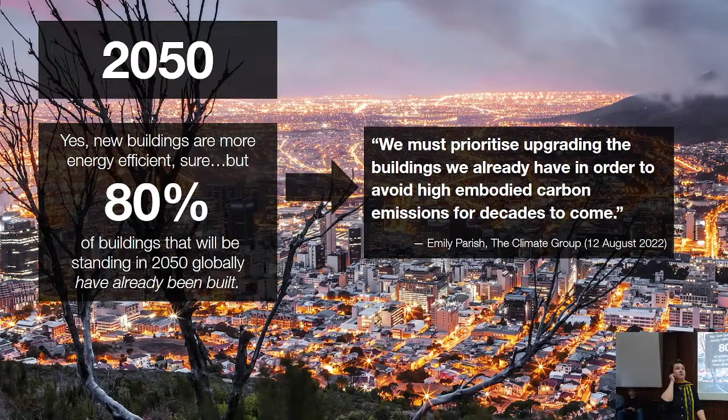In Africa it's a bit different. In Africa, 75% of the African stock will still need to be constructed. Africa is a little different - our context is different, but it's the same trajectory, right? And every 20 years, every city doubles in Africa, in size, scale, complexity, magnitude, everything. There's a lot of work to be done on this continent for the built environment.

But if all the buildings are already built, and they will be built very soon, in your own career, your 5-10 years that's coming, how long do we have to take care of these buildings after they are built? Right? It's not just build the building, we already have the building. What about the life of the building?

On average, a building, wherever you go, is 70 years old, including the one you're sitting in. It's a human lifetime - that's how old buildings are. They live longer than us, much longer than anything else we're busy with. We have buildings older than the industry of motor cars and vehicles. Buildings have lived beyond that. Buildings have lived through industrial revolutions. They're still here. So the average building is 70 years old.

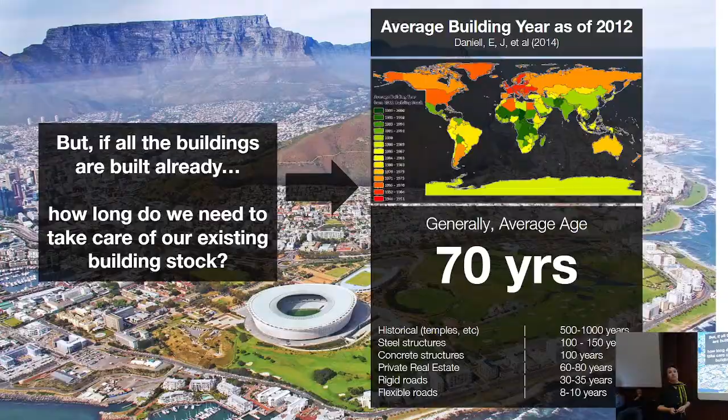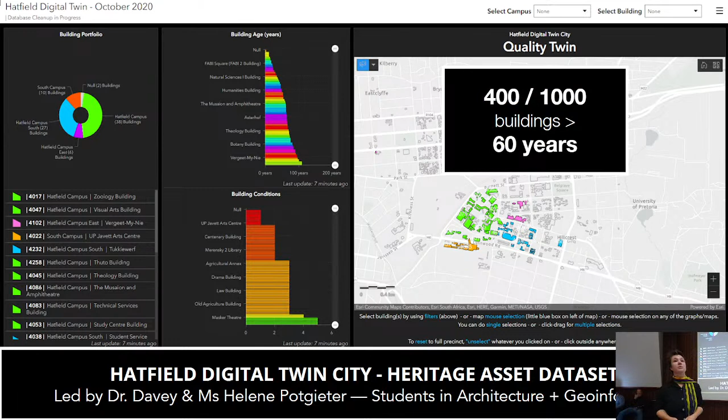You can see that in Tuks. The University of Pretoria is the second largest asset owner in the city, next to the city itself. We have 1,000 buildings, literally. Right now, 400 of them are already heritage buildings, and that number will go up.

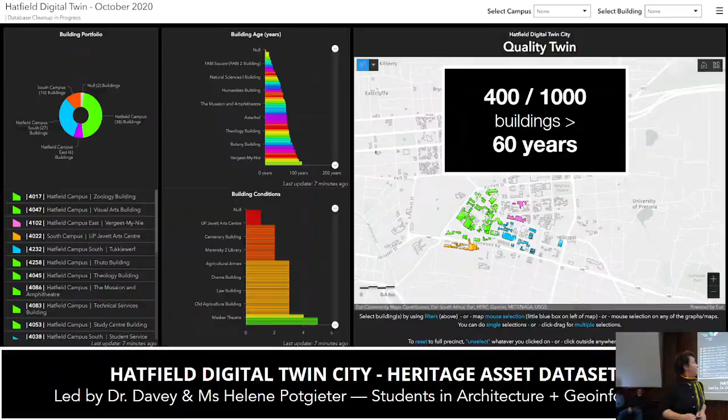So if we talk about the life of the built environment and your job in it, and the real big picture in your own lifetime, never mind beyond your lifetime, let's do some napkin math. I love napkin math. Let's pretend the average building design and development phase, average, maximum, is 3 years, right? Yes, there's exceptions now and then, and so it goes. But the average building takes 3 years to develop and design, right? And let's say it's 3 years to construct, okay?

And if you work in a high-performing environment like Europe, America, Ireland, whatever, those high-performing regions, that time frame is shorter - it's almost 9 to 24 months to build, construct, and be done with it. But that means 6% of our effort of a building's life is in design and construction, but 94% is in the life of the building. Operations, maintenance, use, energy, etc.

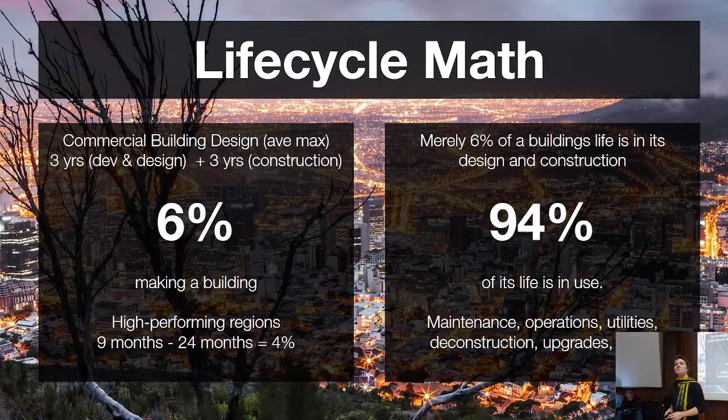If you go to the doctor with this problem, what would he tell you? We need to think differently about the built environment. We can't do it alone. How are we going to create a human habitat that thrives? How are we going to do it in Africa? How are you going to do it in your own lifetime? What is your legacy going to be when you leave this building?

This is why we Harambee. And Maloka reminded me why we use this word. What does Harambee mean? I heard it - someone had, yeah, what does it mean? To pull together, to swim together, to be together, to do work together. That's what Harambee means. It's Swahili, and it's Pedi for that word, right?

We can't build these cities of Africa if we don't do it together. It's impossible. So we are here as a community, and we're inviting you into this community to say, how are we going to build the digital world to help us service the physical world - building cities, communities, and environments? How are we going to do that?

But before we get together and do technical things, we need to change our culture. Our culture for building isn't working for us. It's not my job today to go into the details, you'll find it out very soon. If we don't change that culture, it will not change. So before we do tech, we must do culture.

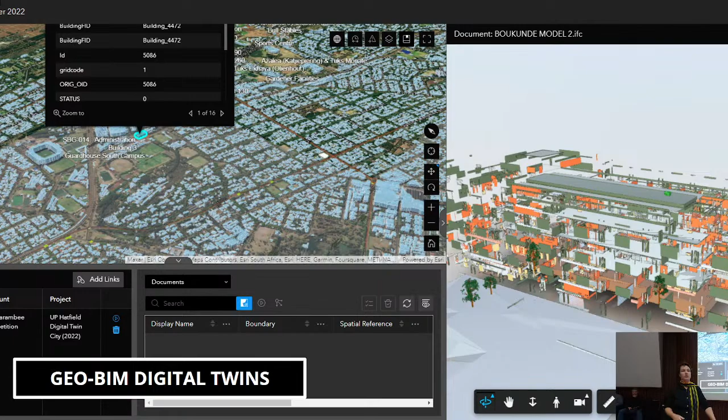And we're here at Harambee to talk and show that culture to you. If we can't build these future worlds, if we don't do it together, it starts with human behavior. We can do amazing things with technology. Go and have fun this afternoon, go play with the toys. We can all do these things, but if we don't do it together, it doesn't matter at all. We can do incredible things, but if we don't do it together, there's no point.

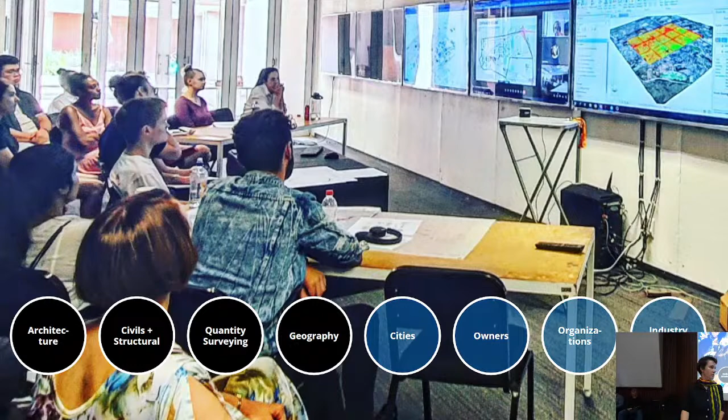And together means everybody must share a reality. The digital world helps us with sharing that reality. It's very powerful in that way. The digital world helps us to come to consensus, to agree, to negotiate from the same page, to see the same world. The digital world doesn't mean it's not part of the physical world. It's interlinked, it's the same thing. We're living in a social, digital, physical, interconnected 21st century. Doesn't matter your discipline, your story, your background, your personality, that's the truth. And the built environment must work together like that if we want to see thriving cities in Africa.

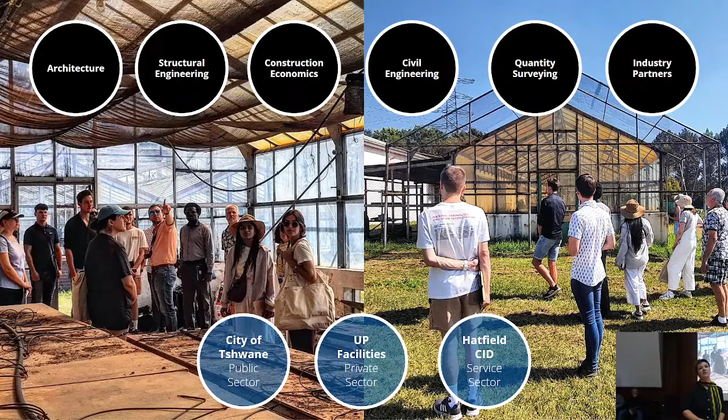End of story. So with that, our goal today is not to show you perfect projects. That's not the point. The BIM Community Africa is here to show you how to behave through BIM to create projects. BIM behavior is the way we want us to shift culture, and we'll show that to you today.

With our team, I want you to start recognizing that it's a collective activity. There's no single person here in the BIM community or the value chain that has a hierarchy above someone else. It's a stupid idea. We're working horizontally, we're working together, and that's the culture we need to shift.

So with that, this is the community's ethos. I'd like you to think about it when you go into work. Leave your badge at the door. I don't care where you're from, I don't care what you know. If you're not working together, you're not working. Do something good for somebody else first. We'll talk a lot about that today. And take care of the future while you do it. If you don't do any of this, don't bother working.

So to do this, we're going to explain to you how to BIM, and that's what this morning is going to be about. We're going to demonstrate that as a team. And then tomorrow we'll go into the nitty-gritty. So before we BIM, before we lift a pen to paper, before we even say what is project, we say why is project. Why are we here together doing anything at all?

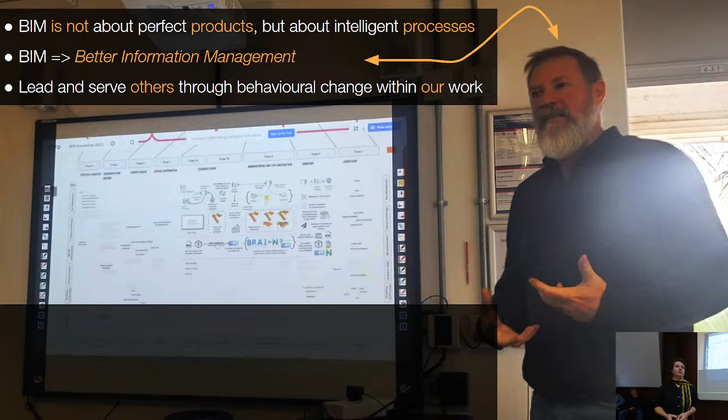It's an excuse to work together. Maybe BIM and making building information management and modeling works is about creating intelligent processes, not smart buttons and products. It's a way to work together better, right? Maybe BIM, as a catchword, is about better information management for someone else, as opposed to just for you. You don't matter in the team, it's us. Maybe BIM is about leading and serving others to help them come along on that journey. Maybe that's what BIM is about. Maybe we need to do that by changing our behavior. Maybe we need to show that to you, right?

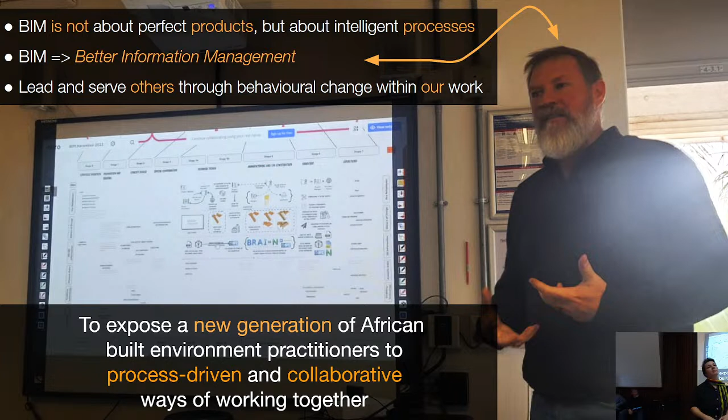So maybe BIMHarambee should be about making a new generation of African built environment experts and specialists who know how to do process-driven work, and who know how to collaborate together. Maybe that's what BIMHarambee is about, not the textbook. And with that why, our strategic definition of why we BIM, we planned BIMHarambee together to create the most value for someone else and to serve someone else.

Do you see how different that is to traditional construction and design? Do you see how much better that can be if you work together from the start? We have not designed the project, we have not lifted a pen to paper. It's not about that at all. It didn't cost us a cent to build consensus. So we planned BIMHarambee around those two questions as our strategic definition.

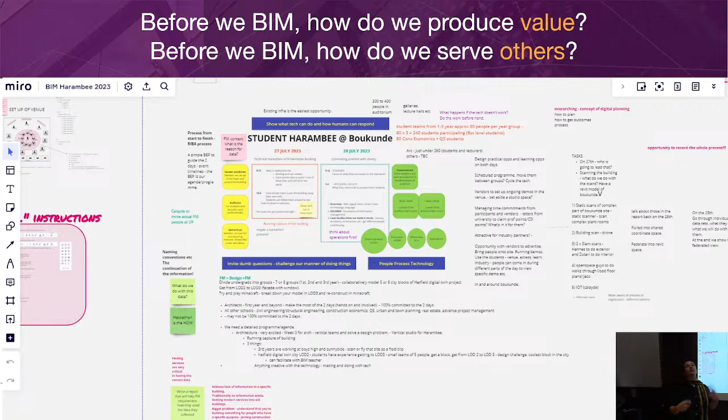So now I'm going to hand over, just so we have a bit more context, to Richard Matchett, who's going to talk about the what and how of BIM, and then we're going to launch our simulation for you. All right.

Morning, everyone. I'm a civil engineer, and I didn't really know much about BIM until probably about 7 years ago, when I started hearing about this acronym BIM. And since then, I've learned a lot of different things about technology and processes, but I've had to explain my job to my parents, and that's helped me break it down to manageable ideas. And when I explain it to my mom, I say, Mom, it's a process where we create information and we share that information in teams, and we use it basically to build stuff and to create value on stuff. Now, she understands that because my dad's an engineer.

She's married to a family of people that are involved in construction. And it's been great to tell her that, Mom, we don't draw stuff anymore. We model stuff. And she's, what do you mean? Well, Mom, because then we're able to share the information with teams and we get over all those bottlenecks that Dad always complained about. And that's been a really great way to think about it in my own career, is as professionals and as you guys move into the workspace, that's the ethos that we're embracing more and more in the professions, is sharing information so that we can achieve really good purposes.

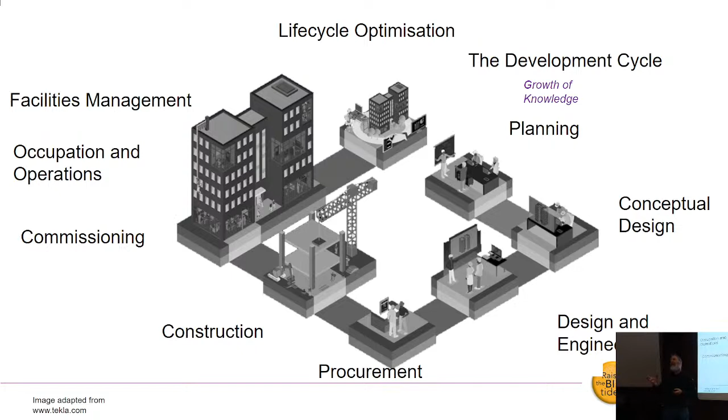Now, the way that this works practically is any project that you're going to be involved in is going to go through multiple stages. And so if you break it down between these different stages, there's a lot of work that goes into each stage. And ultimately going from design through construction into having an operating facility, whether that's a building or an airport or a pipeline or a dam. And that value is then created for the world that we live in, for the generations that are to come and for us to enjoy.

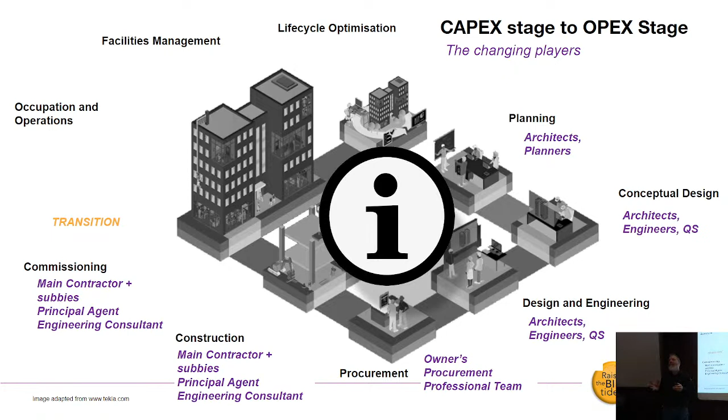But as this gets created, you have this incredible shift from us that are involved in projects, we create things, to other people who are involved with actually using those things. Historically, that's been a great challenge. Historically, the transition from the building stage to the using stage has been the challenge.

One of the big challenges is when you finish a project, there's a truckload of paper that needs to be given to the owners or operators, and it's very impractical. Whereas with digital or electronic information, it opens the doors to be able to search and find information and make better use of it.

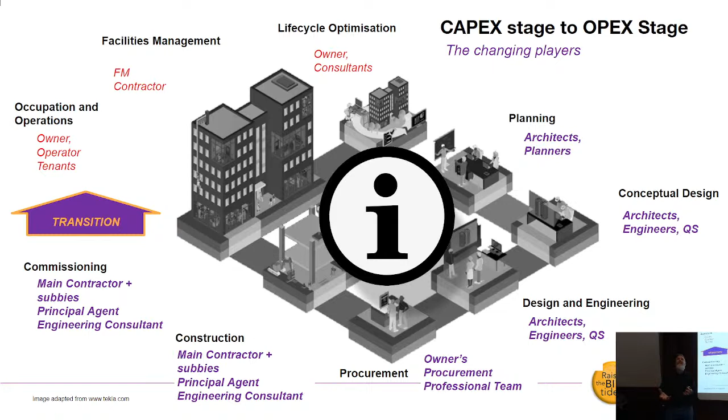And as all of you know, we're in the smartphone generation at the moment. Information drives decisions. Information helps you understand what's going on. So the process of BIM is partly creating, partly sharing, and partly empowering the entire life cycle of the assets we're involved in. Now those truckloads of information, it's still truckloads of information, but now it's digital.

So anyone who's got a Dropbox account knows that your information gets messy very quickly. So it's very important to manage information, right? Otherwise it becomes a hassle rather than a help.

So you need a few things. Number one, we need a standard, because all of us, wherever we're going to end up working, we need to work in a consistent manner. Otherwise it's very hard to align and get things done.

So South Africa and most of the world is busy adopting this ISO standard, which defines how to create the information collaboratively, how to share it, how to pay it forward, how to consider each other in the design, construction, and management process, and how to make sure that information is of a high enough quality that it is useful. You need a team.

We spoke a lot about teams, and one of the basic fundamentals around working together is: the better you share, the better you work, quite simply. And the more you share, the more information drives understanding and common knowledge, the fewer mess-ups you get. That's a fundamental principle in any project.

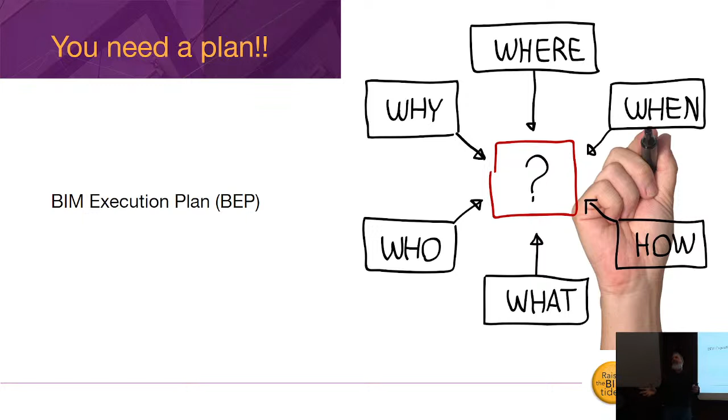You need a plan. You need to know who needs to do what, when, how, why, and that needs to be spelled out. We'll talk a little bit about that this morning.

Very important, you need a workflow, because you start somewhere and you end somewhere, and the steps in between can be very complicated. So it's increasingly important to map out those steps in detail one by one, so that each person in the value chain knows what they need to do and how they need to do it.

And then you need some tech, you need tools, from computing power to measuring instruments, from things to understand what is, to other things to understand what will be, and to communicate that with all the stakeholders.

This is a bit slow, isn't it? So how does all of that relate to our work?

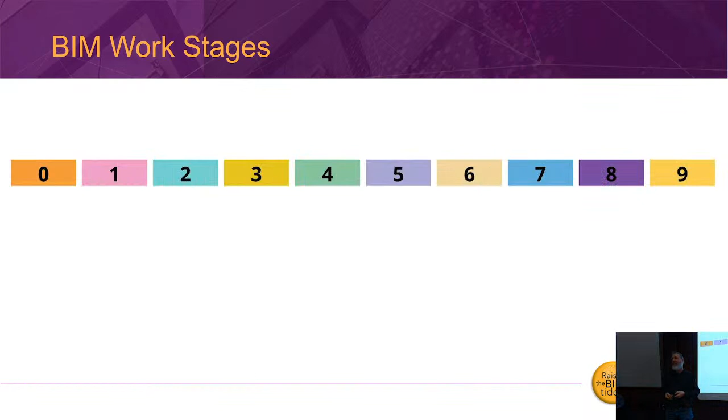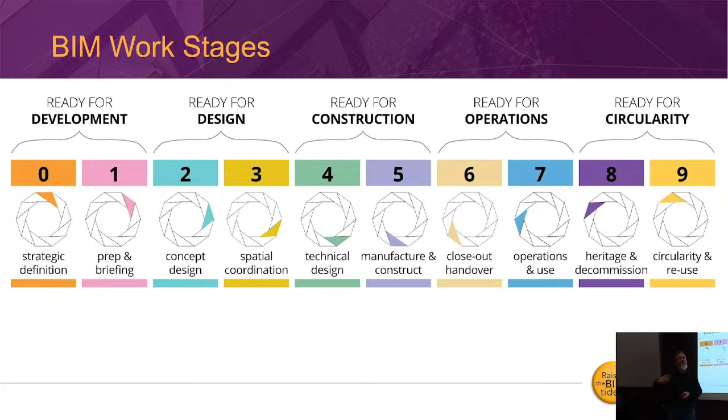I'm going to come back to these stages and say that this stage definition that Khaled introduced just now is incredibly useful to plan the workflow throughout any project, from beginning to end. So for the rest of this morning's session, before we go and have a look at the exhibits and demonstrations, we're going to spend time looking at what happens in each stage.

And then when you go out of this room, you'll see what we've talked about briefly now in practice, and you'll be able to talk to companies that are using the technologies or workflows we're explaining, and ask them specific directed questions.

I encourage you to think about how this relates to your area of study. Where are you going to end up working? What type of work are you going to do? And how does what you see today spark an interest in how you think you're going to be doing things?

I also encourage you to take what you see today and blend it with what you're learning, the textbook knowledge you guys are gathering at the moment, and start seeing today's information as a method of how you're going to implement the theory you're learning and turn that into practice in the world you're moving into.

So let's have a quick look over here. Strategic definition: we've got to find out what we're going to do. Khaled's going to talk to that a bit.

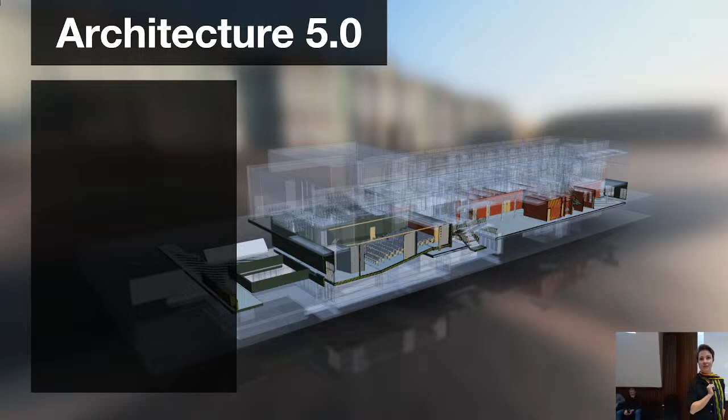We looked at our building and said, what kind of project do we want? The interesting thing is, as the owner, I didn't come up with this idea, the team did, because we were talking about it together. I'm still shocked by that, as an architect I should have the big idea. But because we talked early on about purpose and culture, we said we must stay within our constraints. We have a limited budget, we have no money, that's a fact. So we can't go crazy, that's a constraint.

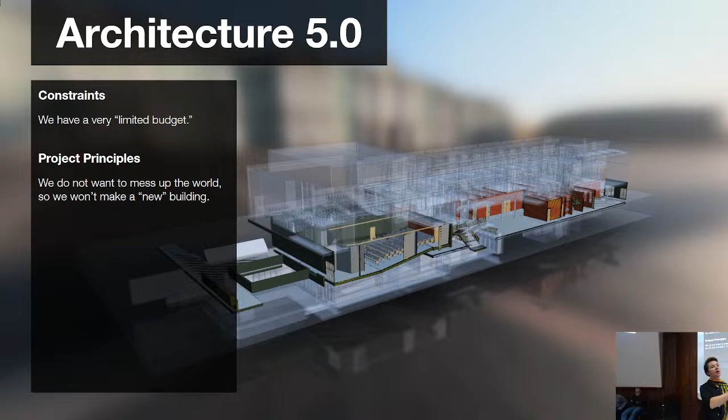With these principles, the team said, shouldn't we build a kind of building that aligns to these things? The most sensible thing to do is add two floors to the top. The building is strong enough, it's good enough. That's our plan. It aligns to all the principles, it fits into the constraints, it sets up our values together, it's possible for us to do it. And we've not lifted a pen to paper.

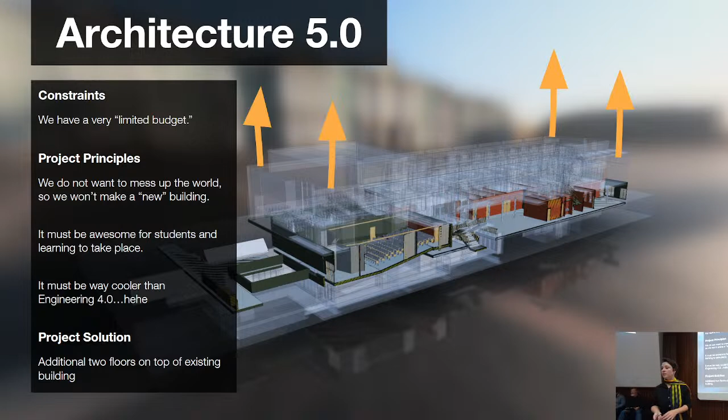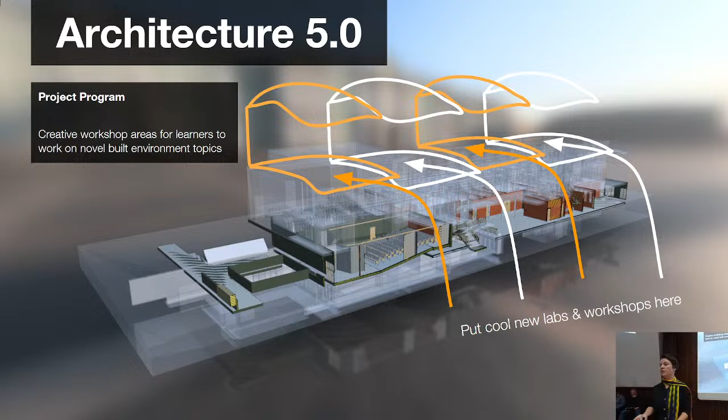So here we go, Boukunde Architecture 5.0, that's the project for us. We want to put cool new labs and workshops on top, and a lot of creative environments to practice and make a mess in. It must show off all the topics we're interested in, and these topics will change. Today they include the York timber chair and timber construction, living walls and green buildings, flexible facades, climate action, cities and futures, digital learning. This is the stuff we care about, we need to practice in that, we want those labs to do it.

So as a team, we're very clear on what the project is and what it isn't. We have not lifted a pen to paper.

My job as the owner is to say, how do I take care of my team? What do they need from me to be successful? And what kind of information will the building owners of the future require? How do I act responsibly now? In BIM, I need to take care of four things, we call this the information needs, there are other ways of describing it, read your book. But for me, my job is to take care of the OIR, AIR, PIR and EIR string of information: the organizational, asset, project, and employer's information requirements, for the people who use the building forever.

So the question I ask myself as an owner for the OIR is: what information do we need from this building and its design process to ensure that we make good decisions in the future, and others can do their work? In other words, I build a client to-do list for now and for later, right at the beginning, before we lift pen to paper.

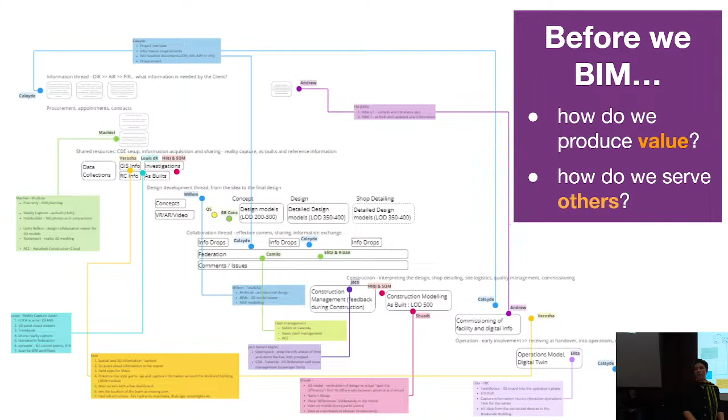Traditional design and construction never does this. Not once. Who's been in design and construction in the field? Who's had pain? Because we don't build consensus from the start. This costs us nothing to have a responsible conversation. Nothing. So now that we know how do we produce value and what we serve and what kind of building we have, now I can say, let's start.

And this is how BIM kicks off. So I'm going to hand over to the next phase of the project. Modena, SOM, Hilti, Zutari, and Esri. We're going to talk about stage 1.

Right, so if the speakers want to come and join me over here, we're going to go through this quickly.

So now that we've got the employer's brief, essentially, and all those different information requirements, well, the first thing that we needed to do as a project team is to put together an execution plan. So the team at Modena then put their thinking caps on, took all those requirements, and then put them together into an execution plan that spells out exactly those questions. So who needs to produce what type of information, by when, give it to whom, in what format, and how are they going to use that?

So a lot of you are working on team projects, right? And I think especially the architecture students, you guys have got late night deadlines, and the engineering students as well. I would recommend that you guys start putting together project execution plans right now. Because if you don't, you end up at that point where it's last minute and suddenly someone has a hissy fit, has a tantrum, and takes over, and tears are shed and sometimes blood.

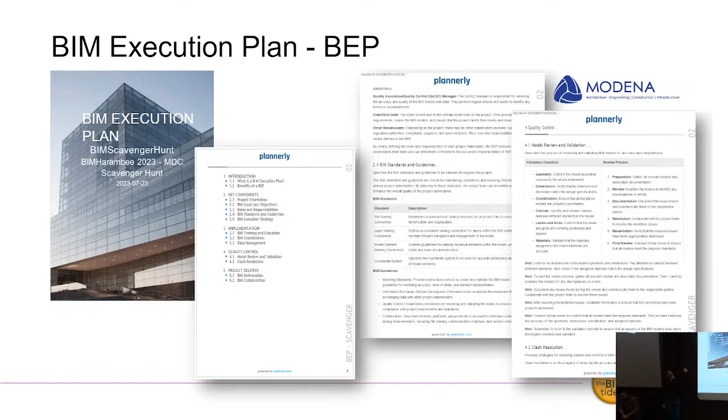No, it's you guys. Wait. There you are. All right, I think you're going to press that one very close to the machine. Okay. Stand in the block. Stand in the block.

So what is geospatial information and why is it important? Geospatial information is the concept of the whole Earth having coordinates. So you already make use of geospatial information on a daily basis, and I'm going to prove it to you. So let's say you want to go from point A to point B. Let's say from UP to a specific shop in Johannesburg. How would you get there?

Waze. Maps. Am I right?

Waze and Maps make use of coordinates from point A to point B, and that's how you navigate. But that's just in a very inaccurate form. So what we want to speak about today is how to take that information and make it more accurate. Think about better accuracy.

Point it at the computer. Yes, sir. Yes! Outside. Thank you, alright.

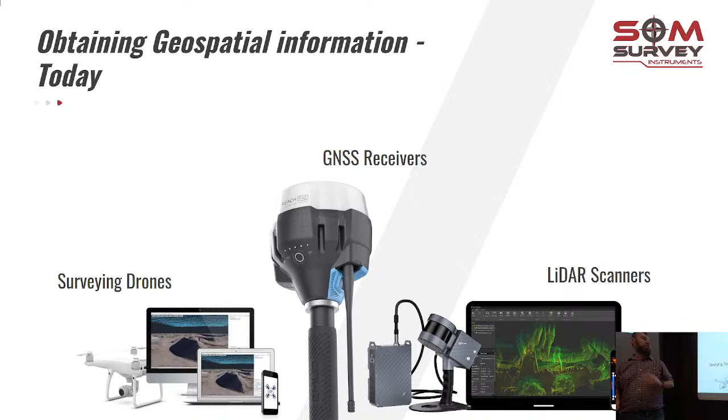Louis de Klerk, I'm from Zutari, and I'm our reality capture lead there. So we're talking about collecting and sharing information, and as an industry we call this basically reality capture. It's a term that's been around for a few years now, but it's not that common yet. To summarize, we digitize real-world assets using technology and software. It's not just about the tools and the tech. These reality twins become the geometric reference information for the rest of the process.

Okay, so that's the first set. What is used in industry? We used to be there, you can still use that, but if you take something like a total station, it's going to keep you busy for a while. When we get to accuracy, you're going to lose the plot there. So this is the range of tools that most of us use to capture information, and all of these have a very specific place together with all of the software to bring this picture together.

So survey control and how critical it is has already been discussed, but for the reality capture process, that's also the first thing that happens. That doesn't only happen when we go to construction. Before we start collecting information, we make sure that we've got that critical base, that we know what those fixed points are, and that everything is tied to those coordinates.

Drone photogrammetry—there's no real such thing as a drone survey. A lot of people ask me for drone surveys, but they don't really exist at this point. So we stick to drone photogrammetry.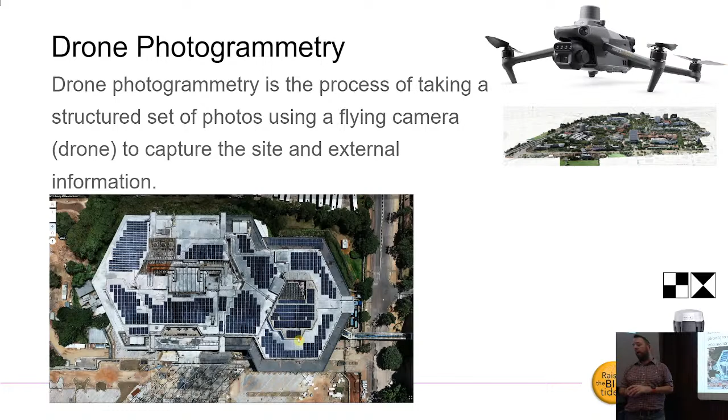Next we need the inside, and that's where 3D scanning comes in. Using LiDAR scanners, you get handheld SLAM—simultaneous localization and mapping, for those who haven't heard that term—or the more common stationary scanners on a tripod. You move them through the building, all in various accuracies, but they capture the insides of a facility very accurately.

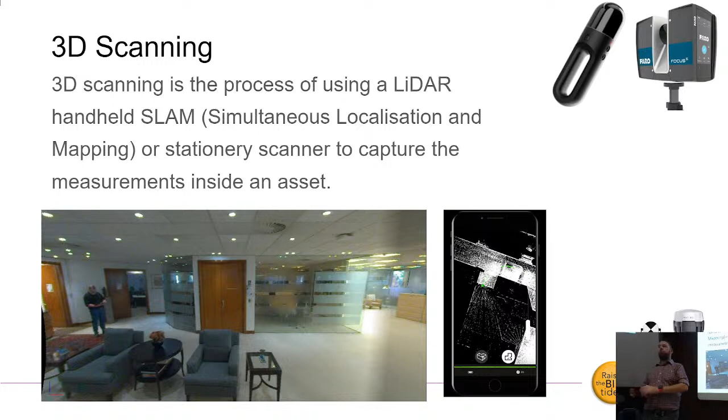Putting a high density scanner in a room like this will take 2.5 minutes to capture each and every piece of wood, speaker, light fitting—everything in this room—and you'll have it in 2.5 minutes. Obviously you need a lot of work downstream to create the actual model, but having that reference information is the step on the inside.

We supplement that with 360 images—Open Space is going to talk about that a bit more later—bringing in the visual component and the condition of that element.

What does all of this deliver? In the end, we want information—not just pictures. The pictures are great, but we need the survey control, so we need those coordinates. Drone photogrammetry provides point clouds, 3D meshes, ortho photos, digital surface models, digital terrain models—a lot of information used by various parties downstream to plan and design their work.

3D scanning provides us point clouds—it doesn't provide a model, it provides a point cloud. Again, reference information to take us to the next step. And 3D meshes, and then obviously the 360 images.

All of this has quite a bit of benefits. We've got rapid data acquisition—you can capture a building like this with a scanner in a day, easily, and get all that measurement information while the drones are running on the outside. That information is geometrically accurate, like VM said, and talking about relative and absolute accuracies, that's where this technology comes in.

Creating virtual site visits—Glade mentioned carbon emissions and vehicles and all these things in the world. Bringing that site that's sitting in the middle of nowhere, or 500 kilometers from your office, back into your office where the rest of your project team can actually view that information, visit the site, and understand it. There's a lot of projects where people have designed some of the biggest bridges in the world, sitting with a lead designer and 10 people underneath, and they've never been on the site where that thing is being constructed or designed.

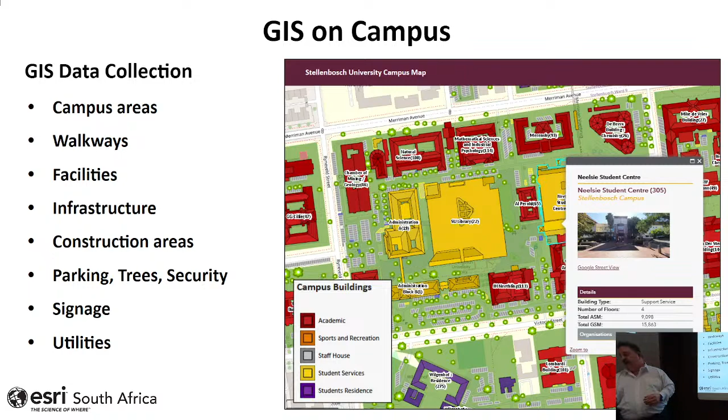Because if you extend the building, you need to make sure that there's enough road infrastructure, the utilities are talking to it, also the parking, the security, everything is related. So we need to look beyond the building and plan around it. You can see some of the infrastructure, road, parkings, and so forth. Here we can see where other construction is taking place from a holistic planning of a campus. We want to know where and what stages of the different construction.

We look at, for instance, parking planning. Interesting one here is also the trees. Where are the different trees? Where are the irrigation network, the water network? Everything around the signage, the security, and the different utilities.

Here's an example of the Stellenbosch fiber network and the IT network. Where do they have Wi-Fi areas? Where are the different networks? This is the same with utilities like water, electricity, stormwater on the roads, everything. So GIS brings all of this together and helps us to understand the environment.

What we also want to show, at our stand down in the basement, we're going to show you a little scavenger hunt where you can go outside and collect some of these assets. The idea is that you would use a mobile application, which can be disconnected as well, so you don't have to worry about having data. You can go out, it will navigate you to the location of that asset, you can verify the location, you can verify the condition, and this is where you also use devices that can be very accurate. Then you can go back to that meter or that transformer and actually get the condition assessment of that.

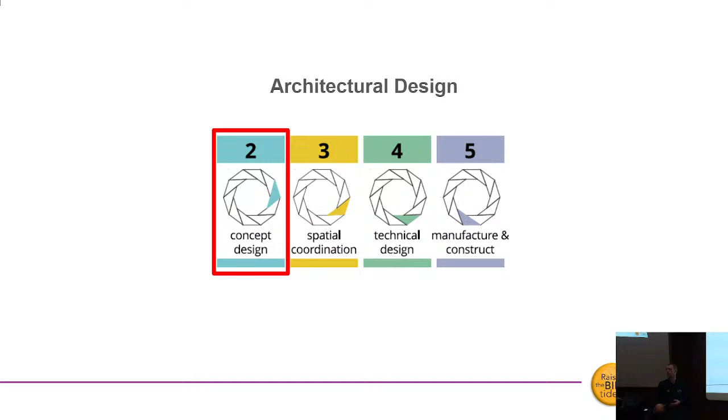For the architectural team collaboration, the internal collaboration of the architectural team, we use the Graphisoft BIM Cloud, which basically allows us to work remotely over the internet with no delay. Obviously, as you guys know, with pandemics and all of these things, it has become a necessity. Our team consists of 3 members: Ronel, who is in KZN, we also have Gert, who is in Cape Town, and then myself, based inland.

So the BIM authoring tool that we used here is ArchiCAD, which supports an open BIM workflow, meaning it gives flexibility for all sorts of vendors to partake. This makes it easier and more flexible and open for more people to bid, instead of having a closed ecosystem, which would mean less possibility for certain people to join the project.

So starting off, before we could do anything specifically, we had to import the existing data. That could vary from a specific 3D format - in this case, as the BIM execution plan stated, we used IFC format, an open BIM format, Industry Foundation Class, along with other available information. Not everything was in 3D, so DWGs and PDFs, whatever you might have, we had to bring those in too.

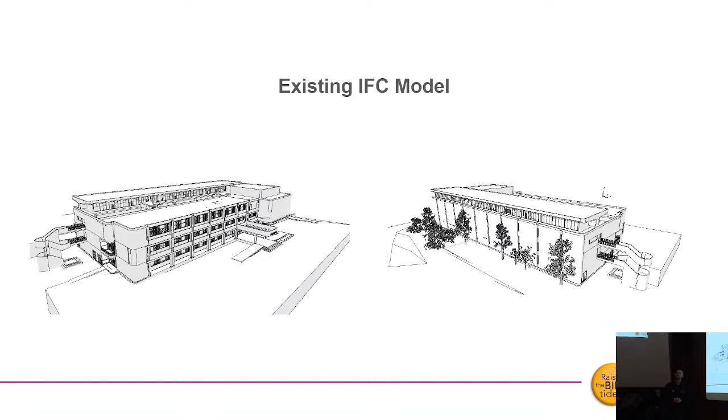There's the existing IFC model, which we've imported. Before we did anything further, we got this from the client - I believe it was done in Revit - and we found the IFC file on the CDE and imported it.

It's quite important to get certain things right from the start in a project, as mentioned before. There are different things you would do to be able to make informed decisions. A lot of decisions are made in the beginning of a project, at stage 0, 1, but also at stage 2. Tools like energy analysis are quite important and can help us make informed decisions early in a project.

I also think it's quite important to involve all project stakeholders from the start, including facilities management. I don't think that happens often in today's projects, and it's important to think about that concept, because if everybody's involved from the beginning, we can know everything from the start and address it accordingly, rather than having to make plans down the line - usually on site, those things happen.

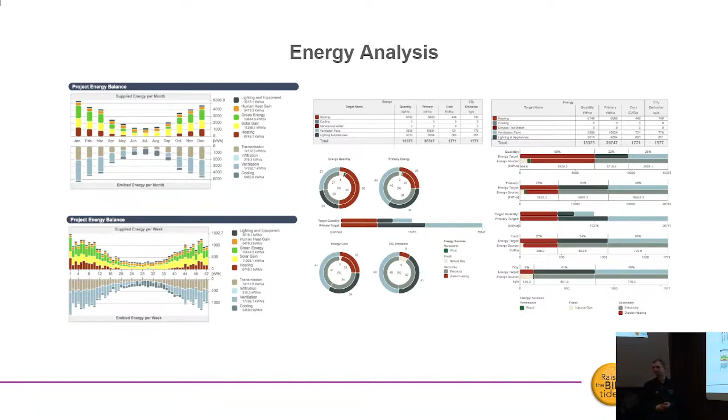So how do we collaborate and talk with the rest of the stakeholders on this project? There are two different options - in this case we use IFC, Industry Foundation Class, and BCF. The IFC is for model-based coordination.

We share IFC files, which go back and forth each stage - maybe not so much in the concept stage, but going further, definitely. That process repeats, where we export IFC files for the rest of the professional team. They then import that information and do what they need to do, and so we all exchange IFC files and collectively develop this building.

The BCF is mainly for issue and change management. So any changes or issues are then, once all of these IFCs are federated into one model, addressed through things like clash detection, which you'll hear about more later.

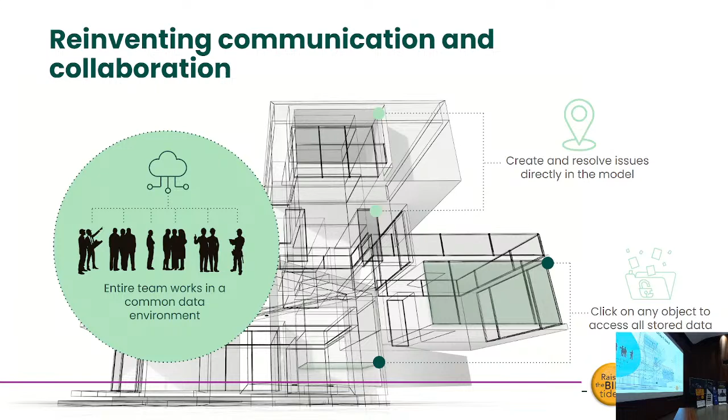And furthermore, we are not managing our design. We are managing other people's design, and we're managing through different devices. We have the computers. We used to have the table where I learned to draw. Now we have the computers, but we have the cell phones, we have the tablets. And those things are becoming part of our life, in a way. Part of that environment is communicating not only in that space, but through those devices that we are using. And they are evolving. Maybe someday they become part of our bodies. I don't know.

So this is the central environment that is receiving all the information from all the different consultants. And I think what's important here, and I want to show you this typical screenshot of where I work and where I spent a lot of time, is that it's not a place where we drop the information. That has changed. It is a place where we take that information, we process it, and then we make decisions based on those conclusions. It's becoming a new paradigm in that sense, because it's becoming a space by itself where we can make decisions based on what we pick up from those models.

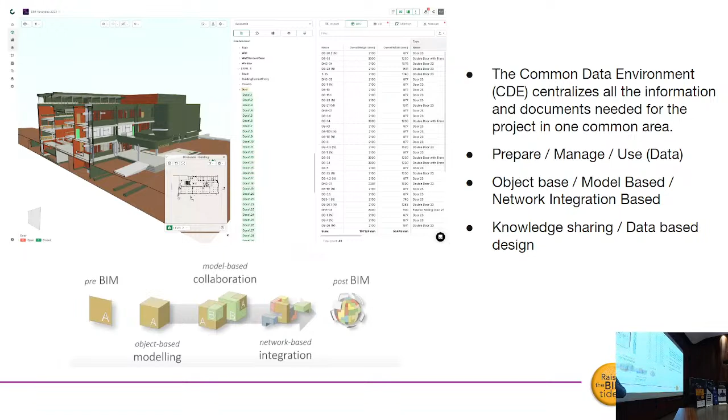So at this stage in the project, we've got a concept that the client loves. We've got all this information, and we're really working through the information, making sure that we know what we need to know to avoid the problems.

Yes, that's yours. That's yours. We've got the same iPads.

Now that process of management of information, I want to just spend a few moments talking about this. In the old days, we used to have drawing offices, drawing boards, and you'd have a drawing office manager, someone who would make sure that all the plans were filed properly or were hanging in suspension files. If you walk around this building, you'll see a lot of that.

In the new way of doing engineering and architecture and construction and facilities management, that information is digital. Now I use the example of my Dropbox account, which is a nightmare. Yours are probably the same, so don't laugh too loudly.

In project teams, there's a new coordination role emerging, a profession of people highly skilled at administering information platforms. Because if those information platforms go out of control, it's a nightmare, just like your Dropbox account. If you've got 50, 100, or 1,000 people on major projects working on the same set of data, and that data isn't properly organized, you can imagine the ripple effect through the projects. So those of you who are tech inclined, consider that as a career direction. Highly technical, strong on administrative and organizational skills, and somewhere a lot of the AI and programming of the future is going to focus on understanding that information.

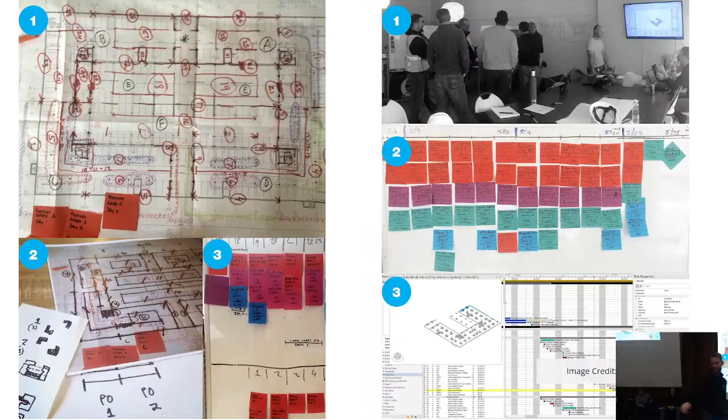What we do is assist teams where they get really busy in the design area, where it's all nice and air conditioned, the pretty side of it. That's where Camilo comes in with his architecture and does the design. But what happens on site is something completely different. So we take this information and do the clash detections, coordinate it, and advise. There are areas where it's influential from one discipline to the other. The architect has his good idea of what would be a beautiful building, but he needs a wealth of engineers behind him to make that dream come true. Each one shares the same dream of delivering the asset for the owner at the end of the day. It's where these shared ideas come together that coordination becomes critical.

Coordination can also influence the tracking of materials, how it gets designed, how it gets manufactured. This is where all the different software comes in. A lot of guys use SolidWorks and ArchiCAD for product designs, and that goes back to the architects using IFC files, Autodesk files, and all the different ones come together into one CDE, the common data environment.

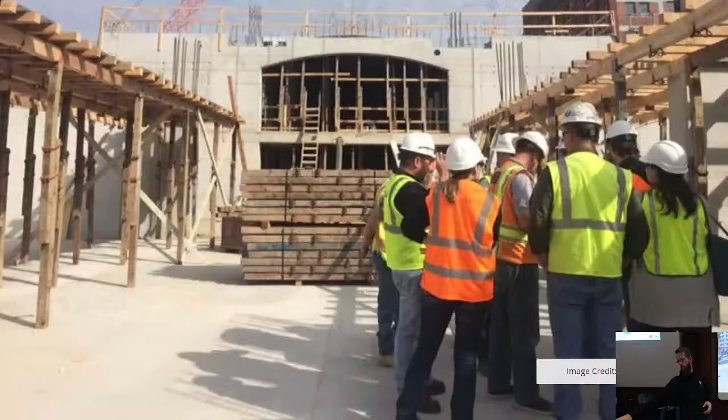To give you an idea, those kinds of principles can also be used for central city planning, where there's an existing building that, by hook or by crook—an earthquake or act of God—needs to be demolished, but there are skyscrapers around it, so we need to worry about our direct environment, and spatial planning becomes important. The actual logistics of the materials needs to be coordinated, because if a building is being constructed, that needs to be planned. We help with those coordinations, and you guys are welcome to come check us out.

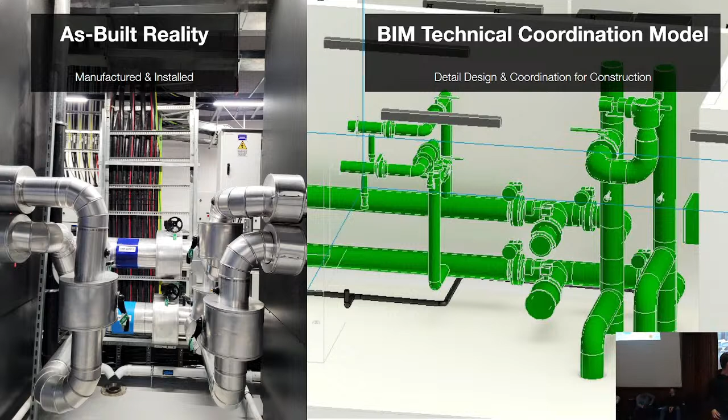This is what was designed and what was built. It looks pretty in a nice, hot office, and then the guys with the hard hats go and build this, and it's nowhere close to what was designed. Then it goes back to that data capture that Sam and the other guys were talking about. The facilities manager looks at his drawing, sees the valve on one side, gets there, and the valve he needs to close is actually the other one, so he shuts the wrong building off. That's where planning and coordination comes into play.

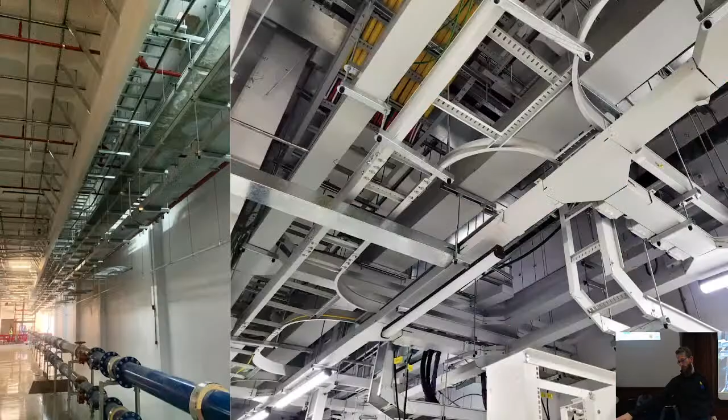This is one of our live projects at the moment, which we're still very much coordinating. This is what it looks like before your pretty ceiling goes in. I guarantee you the structure behind the ceiling looks just like that, believe me. The architect designs his pretty ceiling, electrical engineers make it light up, mechanical engineers make it comfortable for us to sit and breathe. That's where we come in.

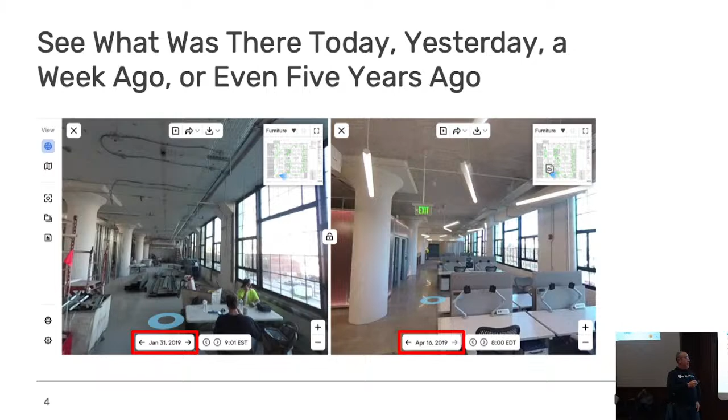Very important for us is capturing the information as we're building up what we call a time machine. Once again, post-handover, facility management would like to see what is behind the drywall, what's above the ceiling, where were those services actually installed. As Nathan said earlier, we can't really trust that it was installed as per the design. There is a concept that as-built drawings should be updated, but trust me, when you go into practice, that will still not happen. So we need better ways to capture these as-builts.

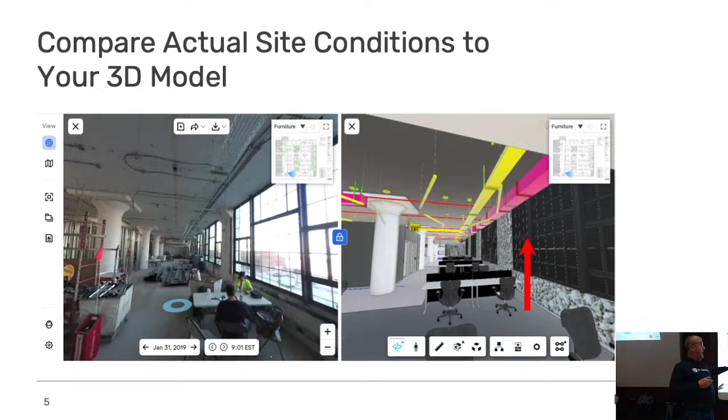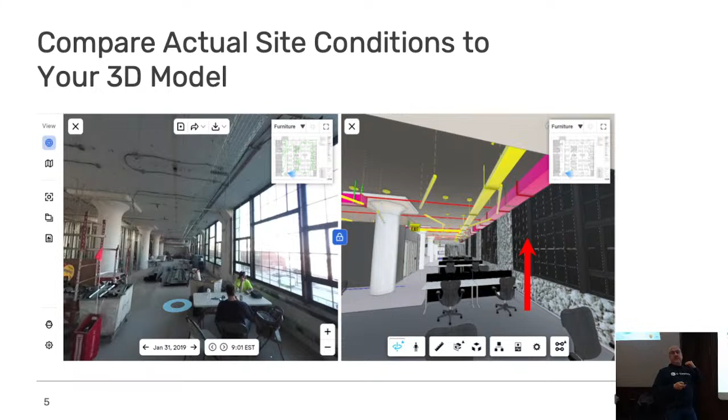Once we've got the reality capture there, what we're able to do is start comparing the design to the reality as we are busy building, and that way a consultant can sit in an office 1,000 kilometers away. They don't need to go onto site because they can start comparing the design to the reality capture, as Louis explained earlier. So this is just another form—this is not scanning, this is capturing, it's photogrammetry of that condition on site on a specific day. So there's a whole bunch of other features as well.

Scanning traditionally would have been those scanners we put onto a tripod—it's a process we need to go through, and those scanners are sometimes very expensive. But should the person on site happen to have an expensive phone like an iPhone Pro or iPad Pro, those phones have built-in LiDAR scanners. With OpenSpace, we're now able to do a LiDAR scan of a specific object and send it to somebody sitting 1,000 kilometers away to be able to measure that specific object.

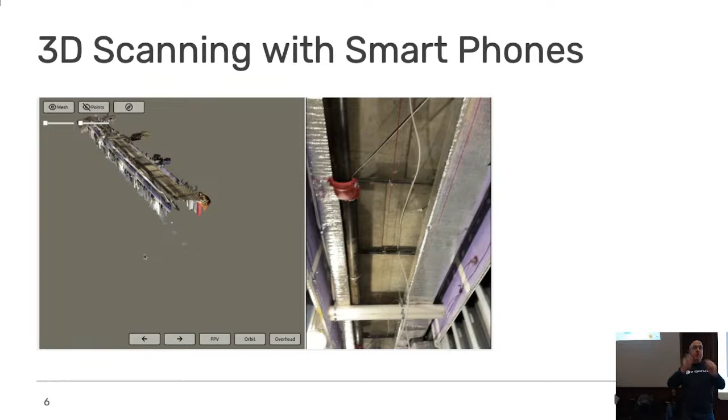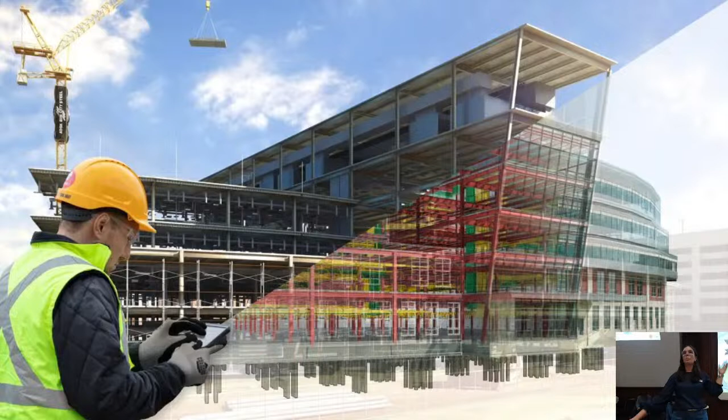There are multiple different things, aspects and workflows that BIM can play in. I'm not going to go through a list of all the different technologies, machine control, prefab, root cause analysis, checking what your contractors are doing, so many different things. The main thing I wanted to talk to you about today is we've heard quite a lot about scanning and reality capture because it's a big part of what happens in the beginning.

So in the beginning, before we start building, let's stay with the book, we made sure that we knew the environment, we knew the building, we knew what we were dealing with. Now that we are building, there's a new aspect of reality capture.

Yaku spoke about this, taking those photos, but you can build on that by also not just having the 360s, but in some cases also doing your LiDAR scanning. You can see different pictures, can be a drone, can be a phone, can be different scanners. And from there, you can start doing some construction monitoring.

Basically saying, guys, this is what we had to do, this is where we are. How far are we off track?

Now, from a scanning point of view, if you're going to scan your site, it's not necessarily something that you will do every day, versus putting something in a hard hat and walking around, which maybe is something you do every day. And the idea is that when we start capturing this information again, we can start to make sure, like, how far off are we?

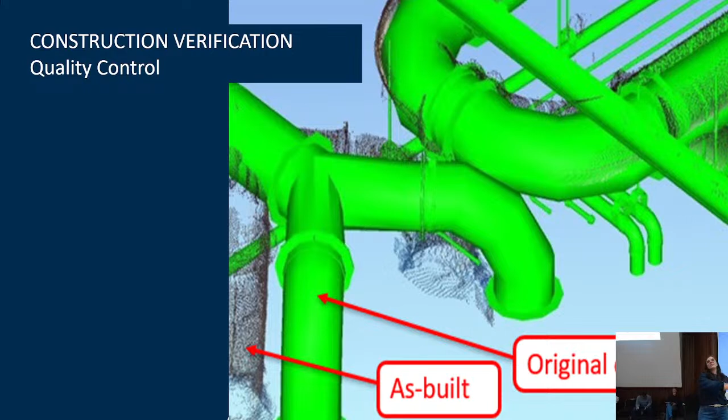We have this design intent and we've got all of this information that's been given to us. What are we actually building? Now, as someone who's currently renovating her house, I deeply feel the pain of not really knowing what is there.

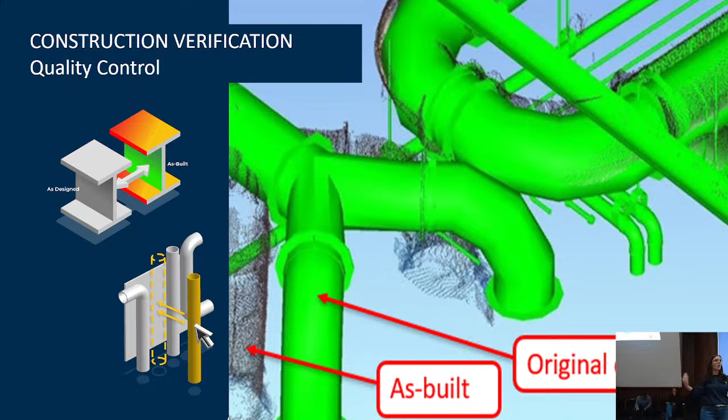But from a scan, you can compare your scan of the actual building to what was designed, and hopefully pick up some of those discrepancies and course correct. Not only just in terms of placement, but we can look at other types of discrepancies, floor leveling, buckling, those types of things. And in an ideal BIM world...

We then adjust our model to make sure that if the pipe was meant to be here and I now built it here, let's update that in the model, because like Lade said earlier, we need to think of the next person, we need to pay it forward. What's happening after this is I'm paying this forward to the client, and the client will really like to know where his pipe is, so that when he starts upgrading that building in 70 or 50 years down the line, we don't see any issues.

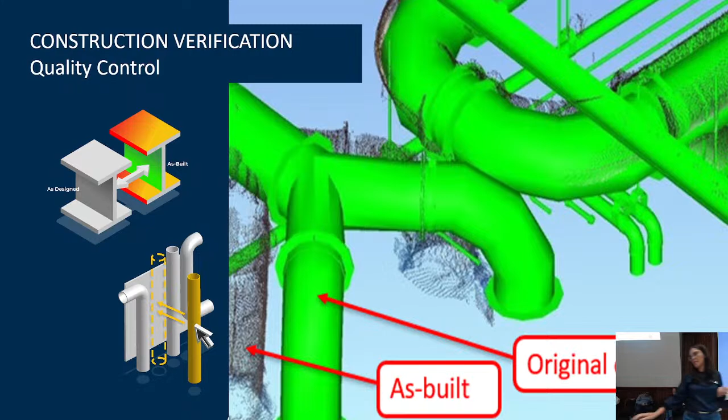Now, part of that construction verification is managing the quality of things. In terms of managing quality, how do you capture and take that information so it's not just thrown into your own personal Dropbox folder, and someone needs to figure out what to give to the client at a later stage?

From a quality inspection point of view, all different types of inspections and aspects of what happens on the building site can be integrated with what everyone else is doing. It's that idea of connecting the teams, connecting what's happening on site to those sitting in the office or those that aren't on site all the time. In the digital world, these quality checks, inspections, snags, safety—all of those things can be done in a digital space where it's referenced to what else is going on.

It plays a big role in construction management, because we've got all this information. How do we use it to our advantage when we track and manage stages, look at RFIs, look at potential change orders that come from that? What kind of defects, what kind of budget impact are we looking at?

We've heard that the client has a very limited budget—pretty sure they also have a tight deadline, because it's always like that. Those things are linked into that common data environment, and all of this collaborative effort we've seen up until now isn't lost when we go into the construction industry.

Thank you. Mine is brief—I was told I have 5 minutes. So, at this stage, we're basically sending the baby home, going, no more nurses, no more helping, here, take care of it.

If we look at some of these stages similar to what we've seen before—and some of you may have heard these terms from a BIM world—this is really that final stage where things go from a project information model to now an asset information model. This is where all of the things that the building owner, and Khaled, said in the beginning—this is what we need in order to manage this facility, and this is what we need to get out of this.

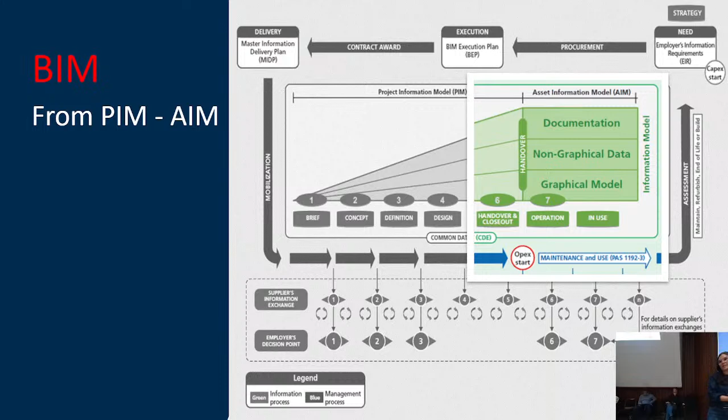We now need to get that information, hopefully not all in pieces of paper in a wheelbarrow, and go drop it off at our office. We need a BIM and a better way of doing that.

So again, we're assuming everything up until now happened accurately—our construction went as well as expected, and everything that happened during construction was accurately captured in a common data environment. It's time to really check all of our assets, do the commissioning, make sure those defects are fixed, that all our warranties, manuals and spec sheets are in one place, well structured.

When Richard spoke about the Dropbox, I too have a similar Dropbox, and for anyone who's seen Extreme Hoarders, I sometimes feel like we're moving into this new world where we become digital hoarders—just, let's save this, let's save this, which is great because it doesn't take up physical space, but it's very important to be a structured digital hoarder, if I can put it to you like that.

So from a technology point of view, the generation of the turnover documentation takes you back to what happened in the beginning, where those information requirements were set.

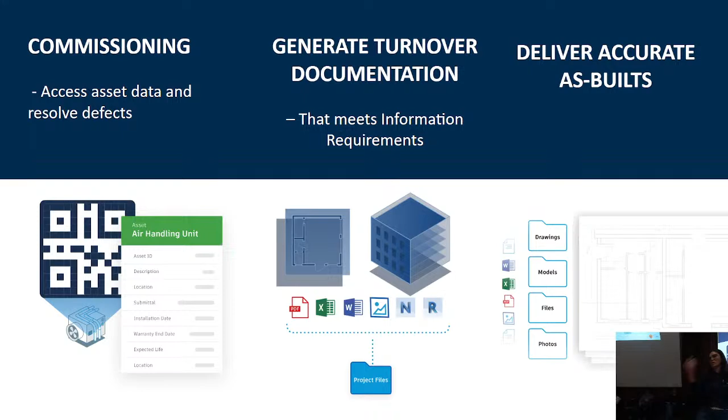This is the final step: we need to make sure that the information we've generated meets those information requirements, and also the information we're handing over meets those requirements. Hopefully the client actually gets accurate as-builts - or really, information on how it was actually constructed - because that pays it forward and adds massive value as the project information model moves to the actual asset information model.

And all of this happens in a common data environment - there are multiple different ones, I can tell you which one I like. Like I said, structured information that someone can find and hopefully use 10 years down the line. Think about the format and usefulness of information to an asset owner down the line - do they know where their pipes are? Do they have their manuals? Do they understand their mechanical equipment and everything else that's part of their facility? That was my 5 minutes.

So now this is a part of the world that is very new.

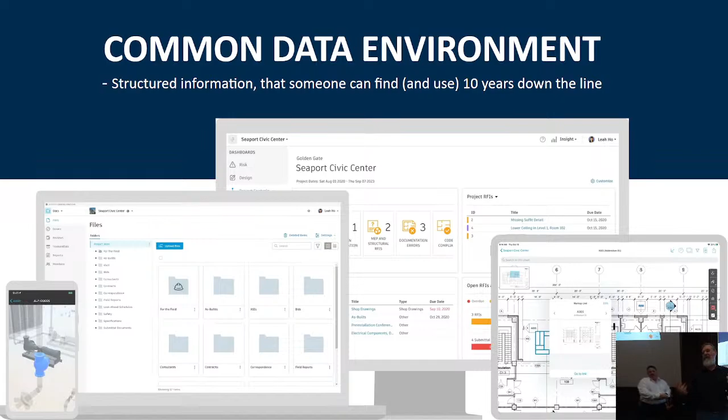Traditionally, a lot of the construction world is focused around building stuff. And as Khalid's intro reminded us, because so much of our lifetime's experience of the built world is already built, the focus on managing things well is becoming sharper and sharper. So in this next section, we're going to talk about how that information might help us - what does it look like, what type of information might we be interested in for managing the facility and the future of the building. Rudolf, you're going to show us more about how information systems can help us understand what's used in the operations and use stage.

Thank you. So what I want to talk about is that throughout all these stages we've been discussing, Esri provides a tool called ArcGIS GeoBIM, which brings these two worlds together - the construction cloud and the GIS side talking to each other. This creates a common data environment as well, so even if we're not on the same servers, we can talk to a different organization or different platform.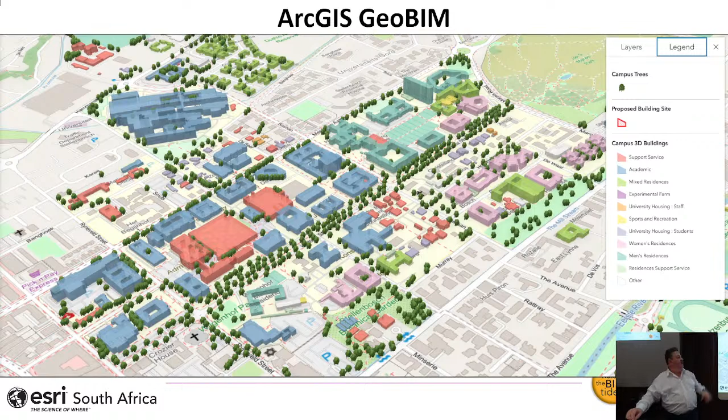So I want to quickly show what we did at Stellenbosch University - this common data platform is the visualization and integration of all these different systems. Here you can see all the buildings as footprints that have been extruded, since there are no BIM models for all these buildings - it's just an indicator of where they are. We've got OpenStreetMap in the background, trees, and all the other infrastructure we spoke about earlier, and we can overlay aerial photography and terrain on top.

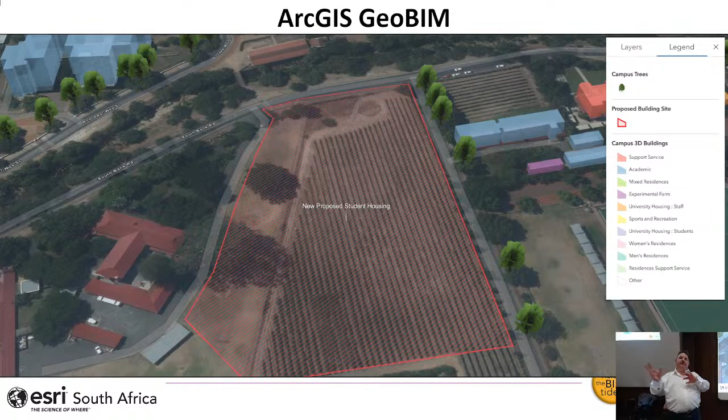We can then use feasibility study or site selection tools within GIS, as I mentioned earlier. Here we've identified an area for new student housing - it looks at all the infrastructure, utilities and so forth to determine where we're going to build. We can also look at things like security - where are we going to place a CCTV camera? Are there obstructions that would create a dead spot for the cameras, where more crime could happen?

Here's another view, so we can see some trees obscuring the visualization of that camera. These are the kinds of analytics that GIS provides through these mechanisms. Then, of course, we can bring in our BIM model in the right location - earlier we spoke about that accuracy, because you don't want to see this building in the middle of the sea.

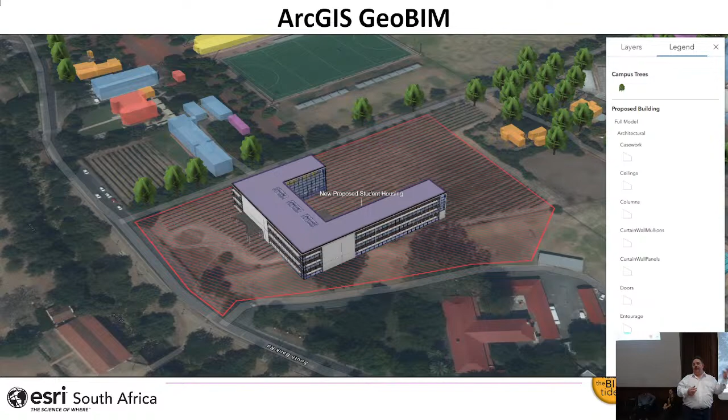So you want to be able to, when you design that building, it must be geographically correctly placed. We've seen it so many times when we work with Revit and IFC models that we utilize, they either sit in the air, in the right spot, but too high or too low, or underground. So be aware of that. That's a fundamental part of this common environment. We want to bring in different data sets that are all geographically placed correctly, so we can plan much better.

So we can see here we have total interactive access to that BIM model as well. Now when it comes to operational management, when we've delivered the project and now it's going to be operationally managed, we can have things like utilities.

There's a fiber network. There's problems with the fiber network. We need to send out technicians to go and investigate. They can be dispatched to the specific areas. They can take photographs, they can do surveys, they can do condition assessments, all those kinds of visualizations, and we can see how many work orders have been assigned, where are the technicians.

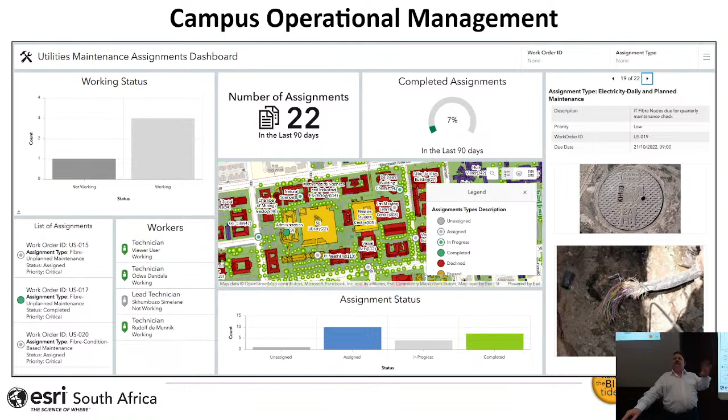So these dashboards run in operation centers, and people can visualize that. Then we also have the ability to show condition assessment of assets. Where are the assets that's going to give us problems in the future? So we can start seeing hotspots of problematic, deteriorating infrastructure, pipes leaking, gas pipes like what happened in Johannesburg. So we can then start forecasting and predicting where those problems are going to be by using these types of analytics.

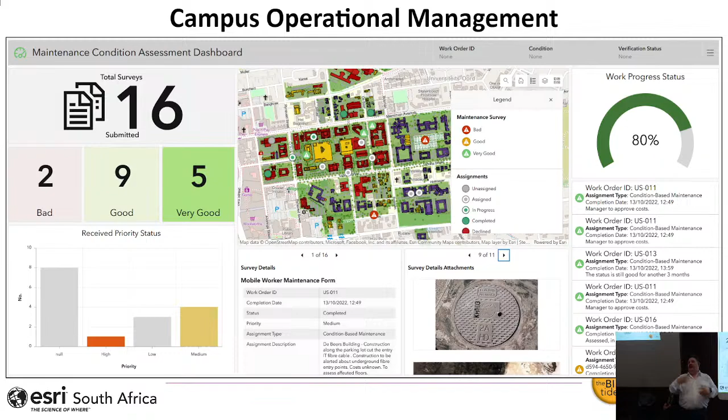And so forth. So now what about accessibility, an interface so we can see everything. So we've got the common data environment where all the data is available, but how will I be able to use it, like a user interface, user experience. So this is something that we designed as part of our software called Experience Builder.

Again, what I mentioned earlier, there's no coding involved. This is all almost like PowerPoint, where you drag and drop and you paste things on a screen. And it gives you that environment that's totally accessible. There again is the Stellenbosch map that's embedded in this environment.

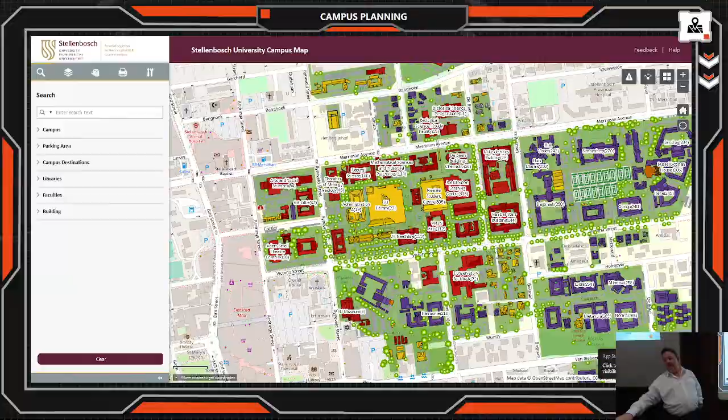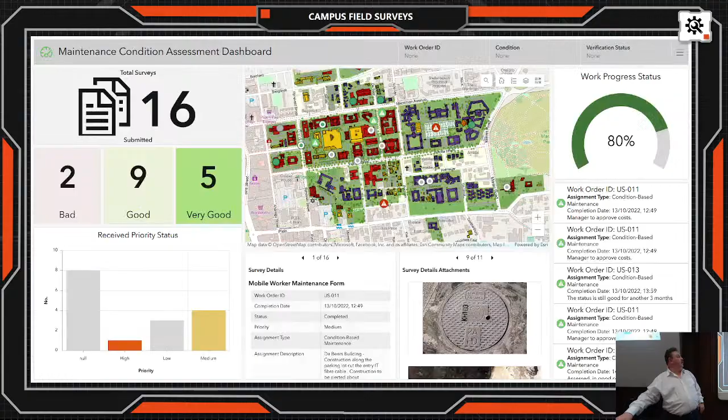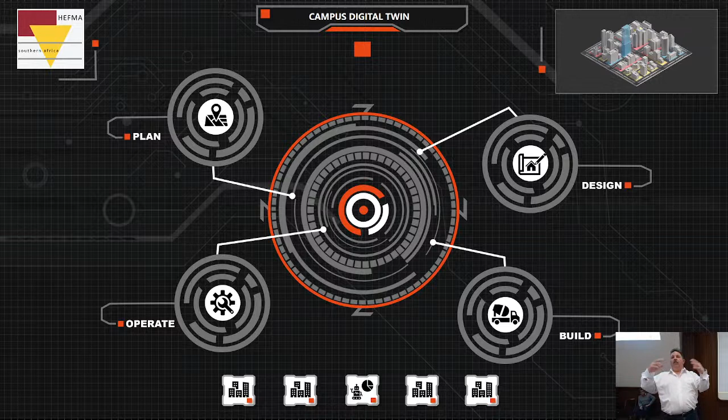We can also bring in the site selection tools. We can bring in our mobile applications, which are available to our field workers and our technicians. And we can also embed those dashboards. And it's all interactive. And we can also share it to different parts of the organization, people that need to have access to things, and people that are not supposed to see certain things. But it has the ability to have access to this whole environment. And the GIS is one of the tools that will help us get this kind of access control.

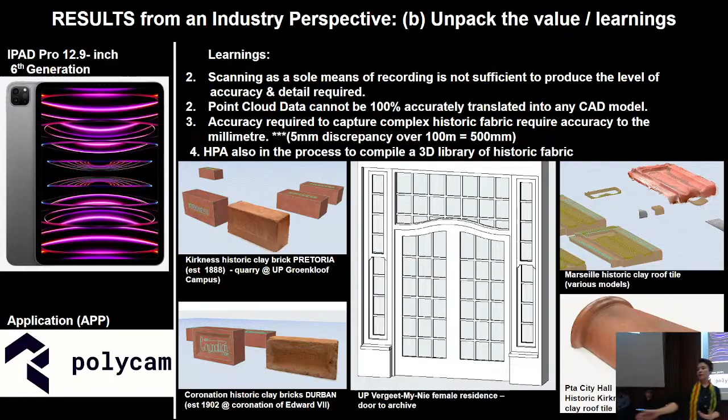All of us are living in the built environment. It is one habitat, and we will eventually need to take care of it, not just demolish it. So on the one side, we have heritage, and please go visit them. It's an active project we're busy with right now. We're scanning the heritage buildings of the University of Pretoria and classifying them for heritage BIM, and there's all sorts of interesting things happening about that.

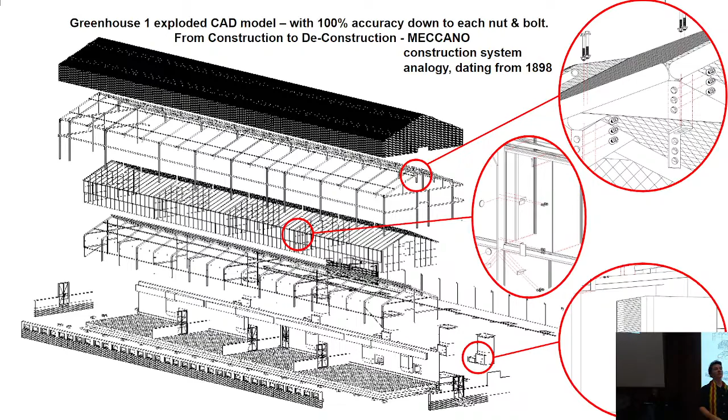A lot of this we'll discuss tomorrow in our case study, which students are also welcome to join, but it's for you teachers specifically. How we need to work with heritage information, legacy information, and carry it forward to preserve, to protect, or send it back for circularity and reuse. We cannot be living in 100 years in a world where we extract and mine and dump everything in a garbage dump somewhere else. The built environment is responsible for a lot of terrible junk, and we keep on producing and mining that.

So stage 9 of BIM, a very new environment, is about how we stop linear work and start circulating our environment. We'll also be speaking about that tomorrow as a case study in the teaching space, you're welcome to check it out. The honors students, hands up, yeah, those bunch, yes - they can help you and answer questions about it. They're studying this topic for BIM for circularity, BIM for deconstruction, BIM for heritage, in quite a lot of detail. Their work is up downstairs, please ask them these questions.

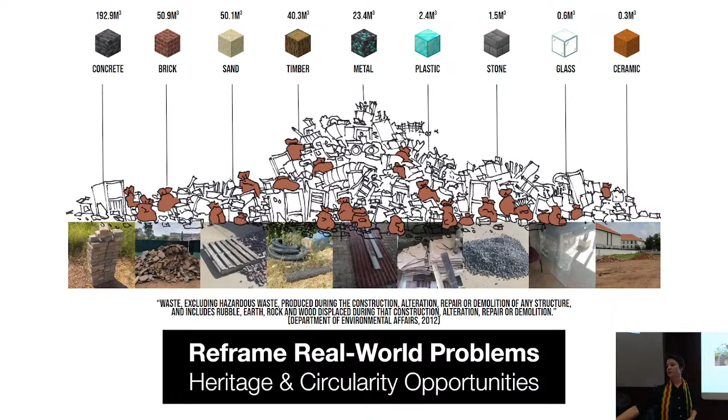How are we going to mine our cities so that we have a responsible future? How does information get mined? How do physical things get mined? How do we prepare the 100 years in the future for that world? That's what we need to do as a community, and it's not just architects or engineers or contractors that do it, it's everybody who's part of the built environment.

So stage 9 for us is we're seeing something very useful and interesting coming about - that if we do better information management about the built environment, these are very powerful tools for us to circulate our resources and produce much more value than just today. So we see BIM and twins, which we're not talking about today but maybe next BIMHarambee, as vehicles for a circular built environment. But it starts at stage 0, it starts with intention, with that culture that we will honor these principles, and how we're going to work together to get there.

So with that, does this help? Does it help to see the whole thing stitched together? Have you had this experience somewhere else before? Does it make sense? Okay, that's what we wanted.

So for the afternoon, we're going to release you into the wild. Did you all get a sticker with a color on it? Give or take, all right. The building has been set up according to these workflows from the ground floor to the top floor. Please start every quarter to the hour at your location and then move yourself through the building. Ask all the questions, play with the toys, make friends, figure out how you are going to be part of the legacy of the built environment. All right, so with that, we'll let you go run wild. See you at 11:45, have fun.